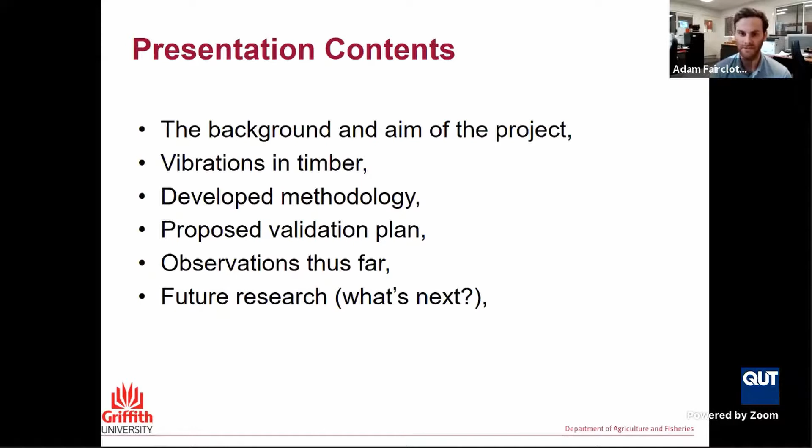So firstly, I'd just like to acknowledge the funding for this project. This project forms part of the Centre for Future Timber Structures hub, which is an Australian Research Council funded hub facilitated by the University of Queensland, with a number of industry partners such as Department of Agriculture and Fisheries, Hyne Timbers, ORIP, XLAM and Lend-Lease.

And my supervisory team, can't forget them. My principal supervisors from Griffith University, Dr. Stephen So and Dr. Hassan Karampour. And my external supervisors from industry are Dr. Chandan Kumar from DAF, Dr. Henri Bailleres from Hyne Timbers, and Dr. Loic Brancheriau from the Centre for International Research and Development in France.

So the background to this project is wood-based mass panels have been widely used across the world and are becoming more readily used here in Australia. A few examples just in Queensland: 25 King Street in Brisbane is a 10-storey tall industrial tower made completely of CLT and glulam, which Aurecon occupies. Second is an apartment building that's just been finished in Kangaroo Point. And the most recent construction announced was in Sydney, a 40-storey tall timber composite building that's due for commencement next year.

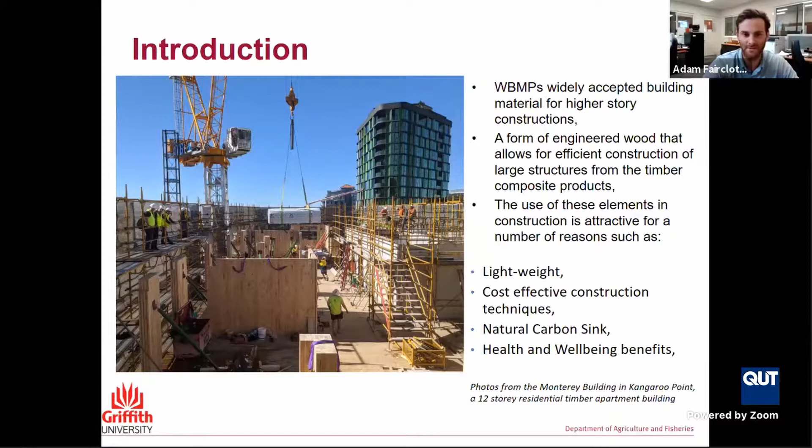So an introduction to the main element that I'll be looking into with my project, which is CLT, Cross-Laminated Timber. A quote that I like to refer to is one by a PhD graduate, Mengzhe Gu, that the design of CLT and glulam composite systems is governed by their serviceability and not their ultimate strength. This basically means that by knowing the mechanical properties such as stiffness and shear moduli, we can determine the application rather than looking at the ultimate loading capacity for when they're going to break.

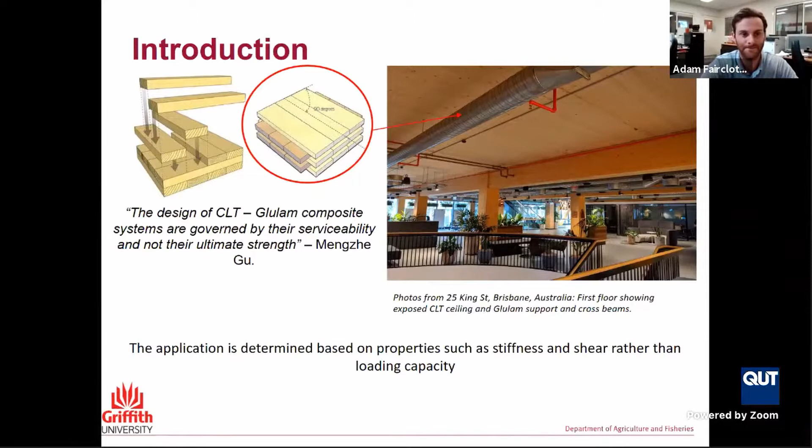CLT is a really good material for both wall and floor applications, but mainly used for flooring due to its large spanning applications, which it gets from that cross-layering technique that you can see in the top left figure.

The mechanical properties of these panels are determined in one of two ways currently, the first being an averaging or pre-manufacturing technique, which is developed by non-destructively grading the individual boards that go into the panel prior to developing the panel, and then using each of the individual values from those boards in an averaging process to determine the total panel mechanical properties. The second is a static testing method, quite standard, where the panel is tested under 4-point loading until failure occurs.

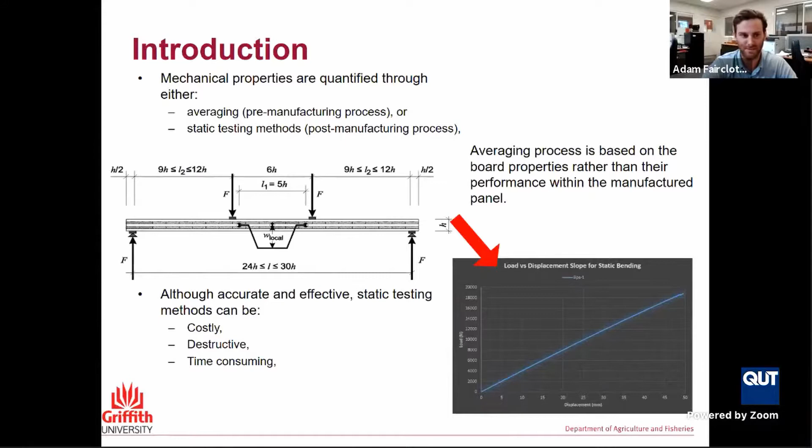And from that, we get a load versus displacement curve you can see in the bottom right, which tells us from the slope, from which we can find stiffness. Now, both these techniques have their advantages in terms of time saving for the averaging, but disadvantages in terms of costliness for the static tests.

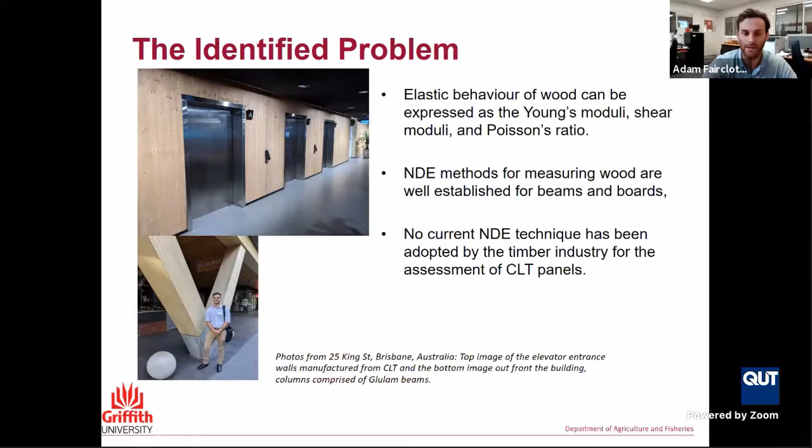So non-destructive evaluation of timber is a common technique for beams and boards, whether that be through stress wave tests or acoustic non-destructive tests or vibration measurement tests. But no such technique has been developed by industry for mass timber panels. Research has been conducted into that area, but no technique has been adopted by industry for use in an inline rapid assessment process.

So that brings us into the aim of this project, which was to develop a non-destructive evaluation system for cross-laminated timber to be implemented and installed within an inline scenario for a manufacturing facility. Within that, there's a number of subcomponents to that aim.

The first of which was to develop a vibration-based system using surface-mounted accelerometers to analyse the vibratory response of CLT panels to impact. The second, to validate those experimental results through static tests, so by taking the full-size panel, which is at its smallest size, 3 metres by 2.8 metres, with varying thicknesses, and then validate the results we get at a full scale down to the small scale destructive tests that we looked at before.

The third is to assess boundary conditions. The boundary conditions, or way in which the panel is supported and restricted in movement, are very important for these kinds of tests, especially if it's to be a rapid-based experiment. And then the fourth was to investigate a number of assumptions that we identified through literature that seem to be the cause for why industry hasn't been as keen to adopt some of these systems that have been developed.

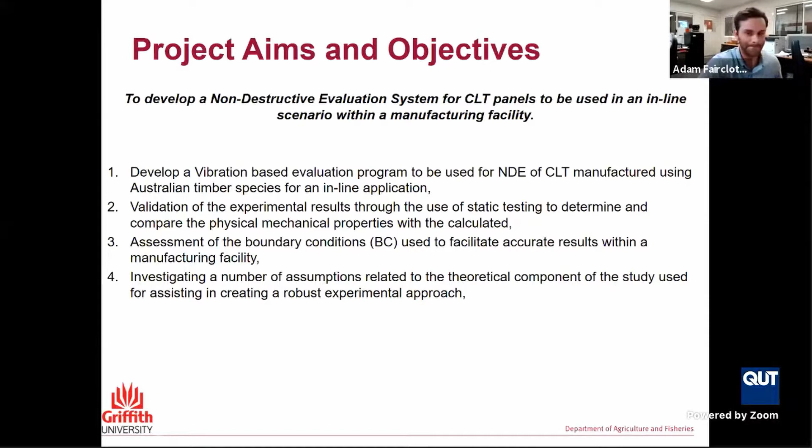So firstly, the method that we've gone with from literature: René Steiger has done a lot of work into this area of non-destructive evaluation of cross-laminated timber especially, and developed this kind of multi-pronged approach of experimental modal analysis and theoretical modal analysis. So this is well understood from what I've seen in other talks, but I'll go through it briefly. Modal tests are conducted on the panel.

Those results in terms of acceleration output and input from the impact hammer are taken and used to recreate the mode shapes. And then at the same time, using the panel properties in terms of dimensions and density and material properties in terms of Poisson's ratio, we can reconstruct that panel and then simulate how it would respond to the same boundary conditions under the same impact load and compare the two. And using an optimization process, tune the elastic parameters that we feed the model to then decrease the error.

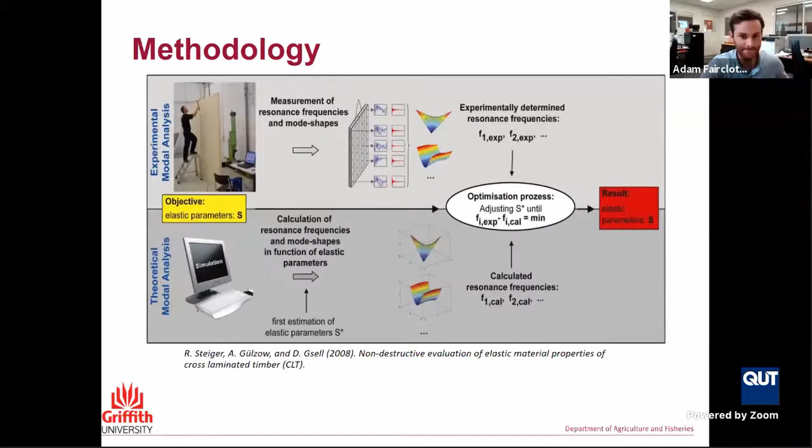There we go. So from that, the first thing that we looked at doing was to pick a boundary condition. From the literature review that we'd done, 5 to 6 standout boundary conditions were reported as being useful and able to do this kind of testing with good accuracy. What I mean by good accuracy was a 10% difference between the experimental results and the theoretical results. So we decided to go with 6 different configurations, as the results from paper to paper did vary with what was the best bet. So we wanted to make sure that we were getting the right condition for the right approach.

So we used air bladders, suspension straps, in different configurations to achieve a freely supported system, and then simply supporting the panel on top of beams to give a simply supported condition, and then supporting the edges and lengths of the panel to give a simply supported and free on perpendicular sides approach as well.

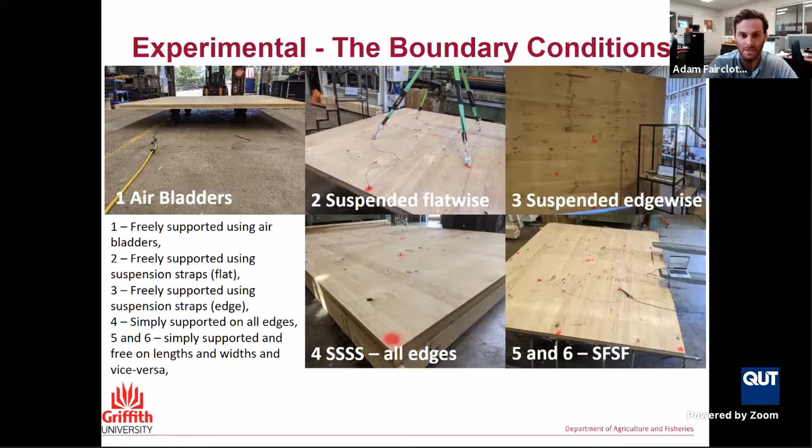So from the results of those tests, we found that the freely supported conditions were by far the easiest to not only set up, but they also gave the clearest results. Although the simply supported and simply supported free conditions gave comparable results, the higher modes did increase in error. And our aim is to obtain up to the first 12 modes to give us an accurate result for stiffness.

So looking into the freely supported results further, we found that there was a noticeable shift in results between the airbags or air bladders and the suspension straps, whether they were conducted on flat or edgewise testing, and found from that shift that more testing needed to be done into the airbags, mainly for the pressure used to support the panels. Doing a pressure investigation, we found that a varying pressure did cause this shift, and the varying pressure went from resulting in a freely supported system to becoming so stiff that they would act as a simply supported on point system.

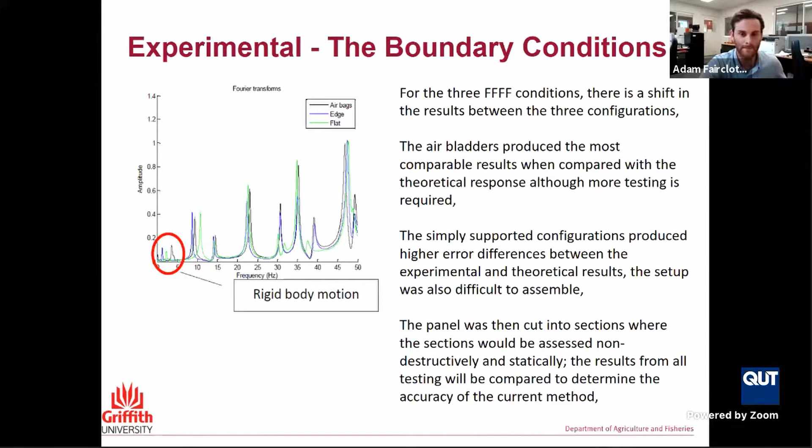So from the experimental results, once we'd conducted all of our boundary condition tests, we found that the airbags in a freely supported system were going to be not only the most appropriate for industry application, but the most accurate, reliable, and repetitive in terms of repetitive rapid tests. So from there, we looked at the theoretical approach that we were going to be taking.

So a known hurdle we observed in regards to this was the effect that shear deformation forces in the panel would have on results. As we're designing a system to deal with multiple thicknesses, varying from 75 mil, the lowest for a 3-layer panel, up to 150 to 200 millimeters thick, the effects of shear can definitely lead to errors being introduced.

So a good way I like to explain this is by considering a large book. If you were to bend that book about the center, you would get some differences in the pages wanting to shift between each other. And by restricting that shifting in the pages, by clamping your hand on one side, the book isn't able to bend as far and it feels stiffer.

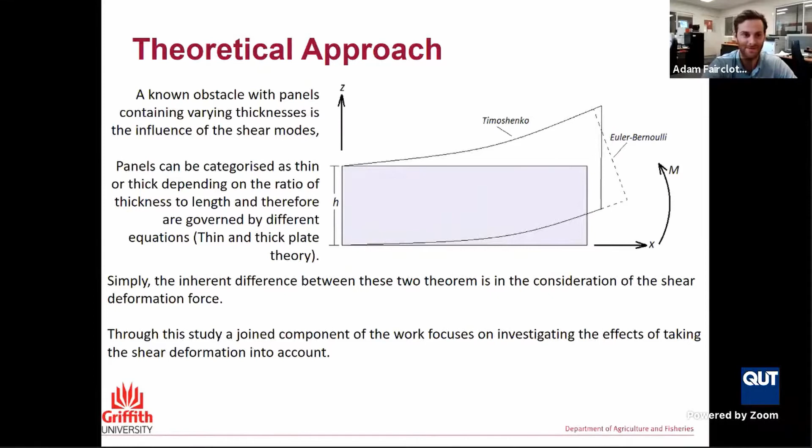And that's exactly what the difference between thick plate theory developed by Stephen Timoshenko and thin plate theory developed by Euler and Bernoulli do. So Euler-Bernoulli plate theory, or thin plate theory, doesn't take into account shear deformation forces. And by using this theory to govern the analysis of thick plates, you get over-predicted frequencies and minimal deflections, which causes your panel to be considered stiffer and stronger than what it actually is, whereas Timoshenko takes into account that shear deformation force.

From the results, comparing our theoretical response, our experimental non-destructive results with our experimental destructive results, we get about an 11% difference in the major direction, keeping in mind that CLT has a major and minor direction depending on the layering of the face boards being in the direction of the longest length, and then a 13% difference in the minor direction, which was perpendicular to those board directions. Those results were obtained from a set of 5 panels, and from those panels, 2 samples were taken from each panel, so a total of 10.

All right, I'm getting close.

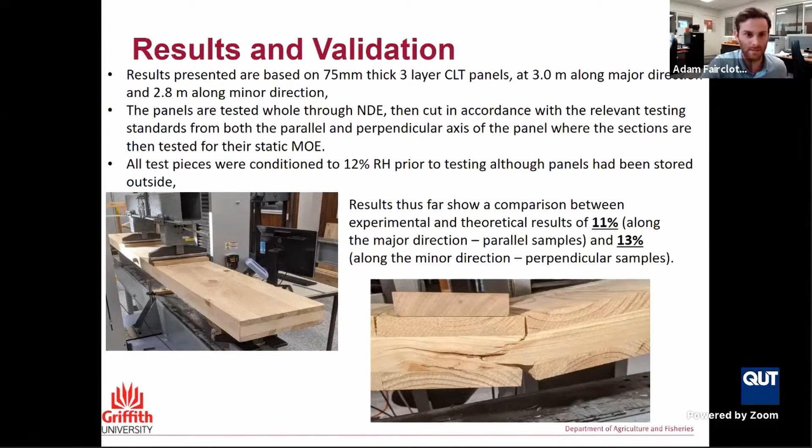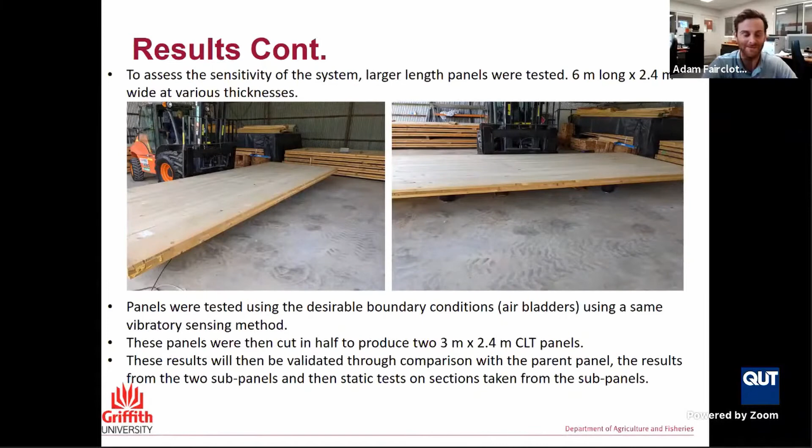So the next thing we wanted to look at in terms of sensitivity of those sizes was to see how far up we could go. The longest length we had access to was a 6 metre long billet at various thicknesses. So we tested them under the same conditions that we tested the 3 metre panel. We are still assessing the results, but the panel was tested at 6 metres, then cut down to 3 metres by 2.4 metres, and then sections were taken off the edges. So far the results match up well in terms of frequency positioning, but the experimental results and validation is still yet to be completed.

So then moving into the assumption investigations that we've done, previous studies have outlined that the panels are assumed to be perfectly bonded or modelled as a whole plate, when in CLT only the faces are bonded together and not the edges. This is definitely not the case. So in collaboration with Griffith Uni and through the use of IAP studies, we've conducted a number of model investigations using ANSYS to model the CLT panels in terms of the individual boards that make up the panel, and compare that with our theoretical approach that we've used for plate analysis.

Depending on the results of that, which we're yet to fully analyse, that could influence how we develop our final system and what kind of prediction techniques it uses. Secondly, using modal reconstruction, we wanted to determine whether the mode shapes and frequencies we were obtaining were of the correct frequencies to ensure that our error was as small as we could make it. So we conducted modal analysis and reconstructed those mode shapes from the tests that we've done.

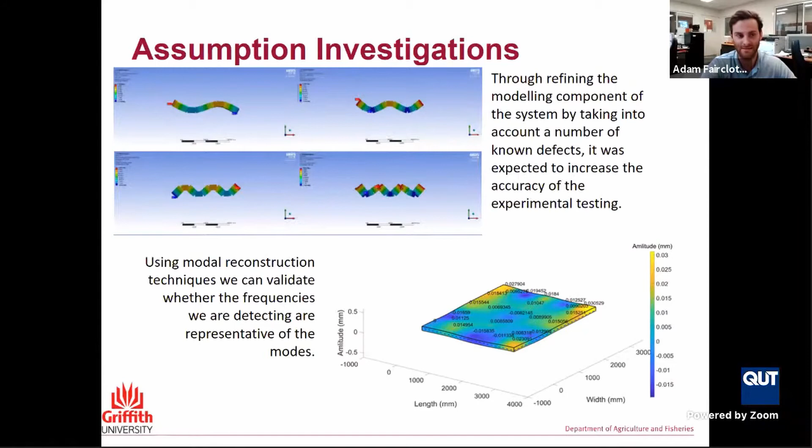Again, not finalised, but preliminary analysis indicates an increased error for higher modes with the ANSYS models, showing that there is a difference between the plate analysis of a whole plate and considering the panel as an individual board makeup. And for the mode shape reconstruction, so far lower modes have a nice small error between frequencies that were obtained, and then as the modes increase, the error does too. So that's basically what that one just said.

And then finally, the expected research outputs: we hope to develop an NDE system for industry to use in a rapid manufacturing process. The system will assist with the QA process, or quality assurance, within the mill, and hopefully cut down on assumptions that are being made in terms of manufacturing. Experimental analysis and testing is still yet to be conducted on thicker panels to validate for those thicker sizes. But so far we're pretty confident with the results from our preliminary tests that we're on the right track.

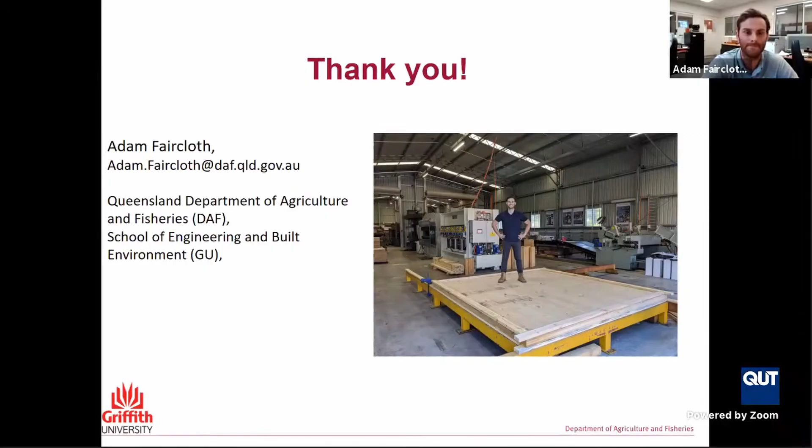Actually, we have heard many presentations regarding concrete and steel structures and the SHM application in those structures. So now with timber structures, as you can see, timber buildings are becoming more and more popular, and the height becomes taller and taller. In Brisbane, we have a 52-meter, 9-story building, and in Norway, they have built a new tallest timber building of about 85 meters. So now structural health monitoring becomes more and more important for timber structures as well.